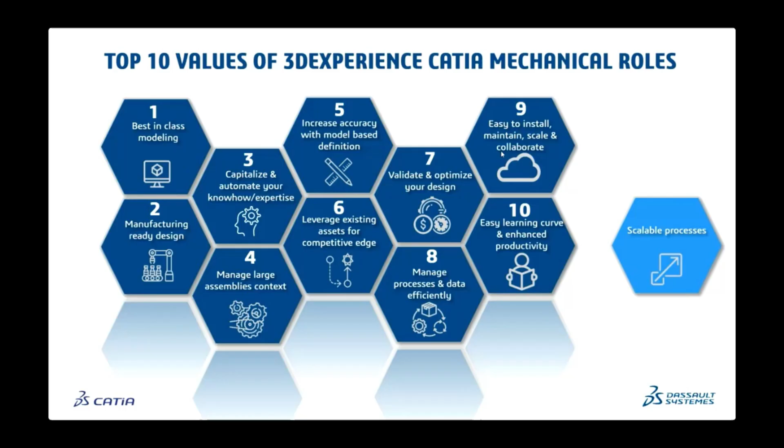And of course, and this is also the very first topic I would like to talk about, it's very easy to learn. If you are a CATIA V5 user, you will pick up 3DEXPERIENCE CATIA in less than a couple of hours, okay? And you will understand why just now. So remember, I will focus on best-in-class modeling, manufacturing-ready design, validate and optimize your design, and the easy learning curve and enhanced productivity that I will start with. Okay, what does it mean?

3DEXPERIENCE CATIA context-driven menu. It's very simple. Once you pick a geometrical entity in your session, a plane, a contour, a surface, a solid edge, a surface edge, the system, CATIA, will show you what is the most valuable command that you should use after having clicked on this particular entity. This pop-up and this selection of the most recommended action is in fact the result of a question survey that we made with experts on CATIA, and you will see that it's quite cool, and it's really also contextual.

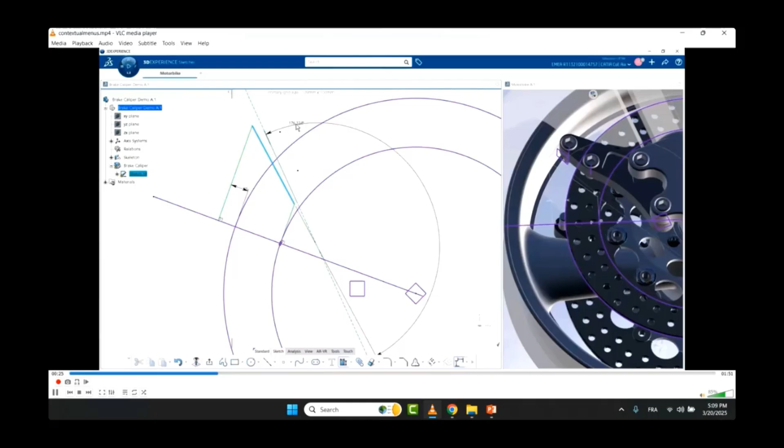You will see that even in the sketcher, depending on what you are doing, depending on what you are picking, CATIA will also pop up the most relevant command, the most pertinent command, according to your pick or your selection. Something you might also notice is that if you type in a dimension, just one click is enough to change the dimension. So in fact, in 3DX CATIA, we reduce drastically the number of clicks, but also, as you can see here, I click a corner. Do you want to do a fillet or a chamfer? And you will just select, okay? So the user is guided.

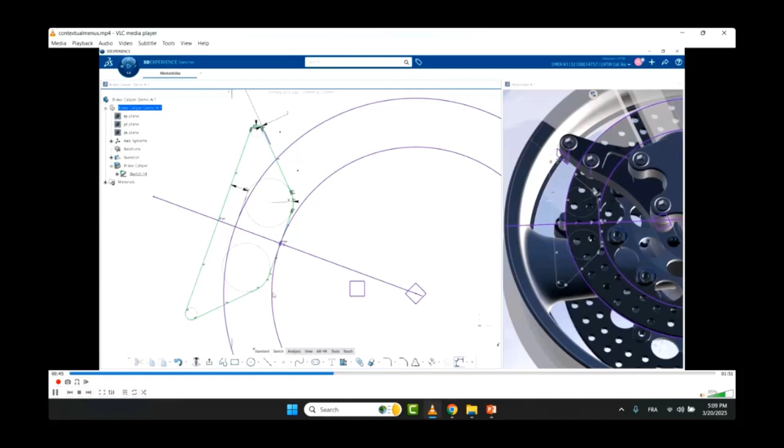The user will take less time to design the same design, but also he will create very quickly what he wants to do. And as you can see, there are not many big dialog boxes popping up everywhere. We try to focus the session around the 3D, and we focus the attention of the end user around the mouse location to be much more efficient and to drastically reduce the mouse mileage. We reduce the mouse mileage compared to CATIA V5 by 2. So not only is my finger less solicited, but also my hand, my wrist is in better shape, okay? So let's continue.

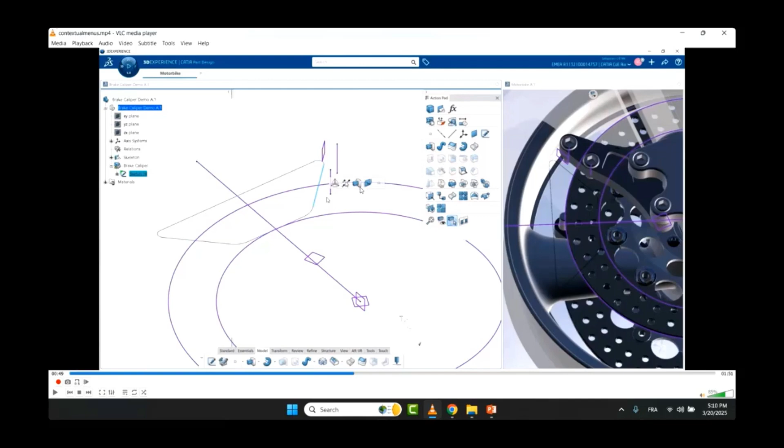Here you can see that when I click on my profile or my contour, CATIA will tell me, would you like to do a pad, which is an extrusion, okay? I say yes. I do my pad. And now if I do another sketch, and I click on the sketch, as you can see, CATIA not only proposes the pad, but also the pocket, because maybe the geometry that you will create by extruding this section or this profile will be used to add material or to remove material. So it's really depending on the context. And this is the beauty of what we call the contextual pop-up or immersive menus.

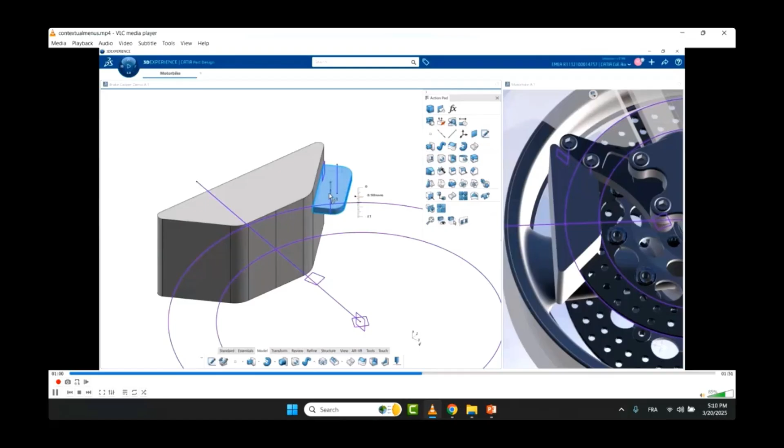What you see on the middle of the screen, by the way, was just the fact that if you want to have your preferred command, you just hit the space bar and there will be your preferred commands, which are located in the so-called action pad. Let's see another example of this contextual behavior.

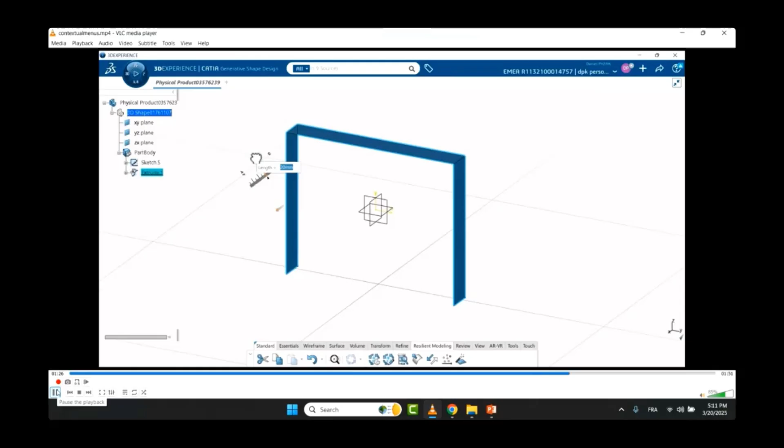Okay, I am in the sketcher. I create a polyline with 3 lines. It's open, okay, it's not closed. I left the sketcher, and now CATIA will pop up with, oh, maybe you would like to do an extrude. Makes sense. I would like to make an extrude. And I create my extrude. I type in the value of dimension of the extrusion.

Okay, and now let's imagine I go back to the sketcher. And I just want to close the contour. It's no longer 3 profiles, but it's a square, a closed contour. Now, if I leave the sketcher, the command that will pop up is no longer only the extrude, but also a fill command, because you can fill a closed contour, but you cannot fill an open contour, okay?

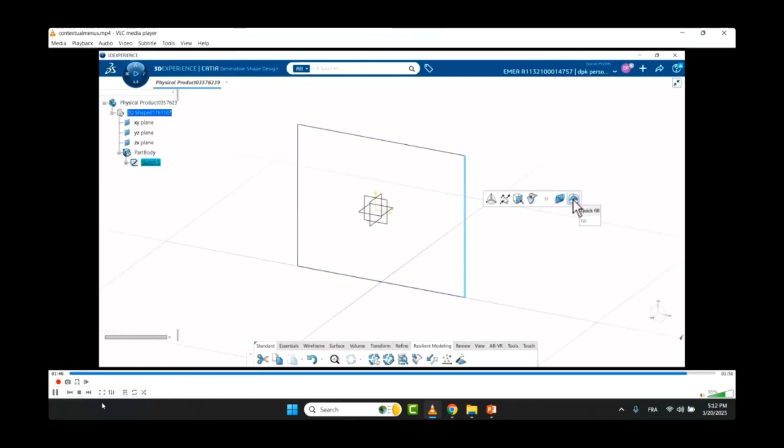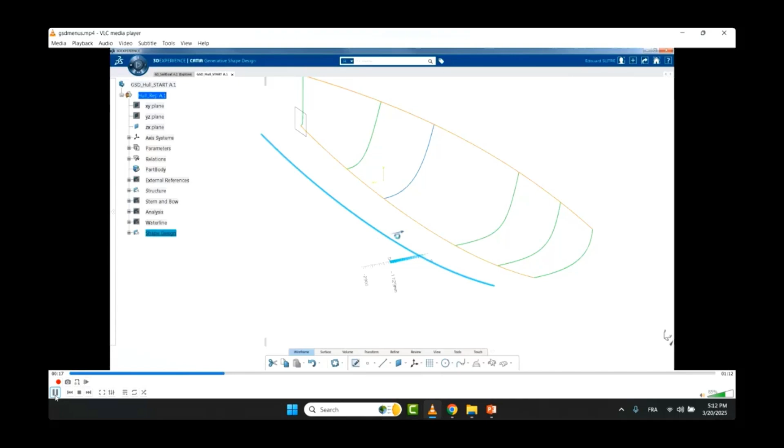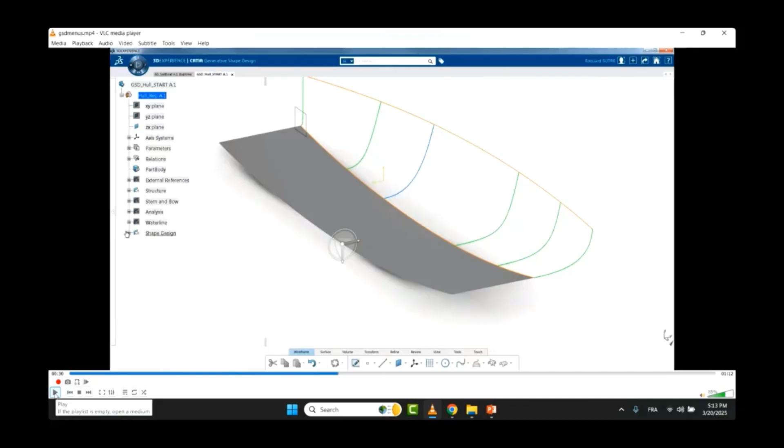I will select the first one and select not translate, but offset, okay? And then I move my compass, and then I create an offset curve. And then I can either only create the offset curve, or also create at the same time the surface. Okay, this is quite nice. I can, of course, change the dimension. And if I want to add extra parameters, much more advanced parameters to the surface that I created, to the extrude, like I was able to do before, I have a dialog box, I enter extra parameters.

So I would say that the classical users or the experts in CATIA V5, for example, probably at the beginning will use 3DX CATIA like they were used to doing in CATIA V5. It's the same. And probably smoothly, gradually, they will move to this new UI. And of course, a rookie will automatically use this new UI, which is much more efficient and much easier to learn.

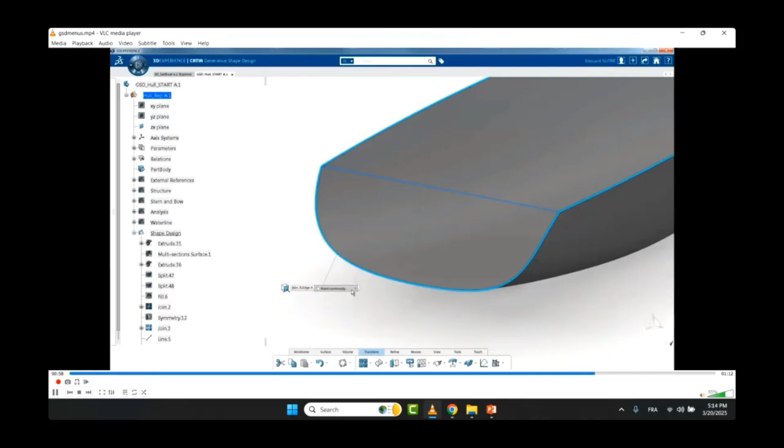Here, for example, I click on 2 points. And once I create 2 points, CATIA proposes to me a line. It makes sense. Then I will create a curve here by extracting it. And I want to extract the 2 curves. So I will just propagate with not only a point continuity or a tangent continuity. And once I have that, I have, in fact, 3 curves. Here we are. And by clicking on these 3 curves, I can also create a fill.

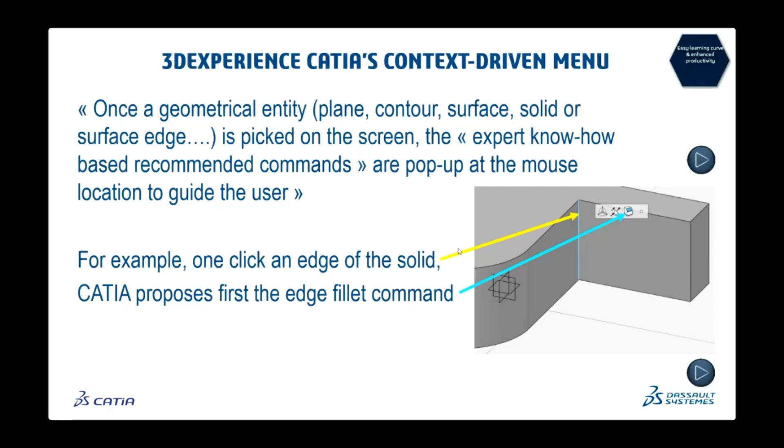So this is quite important because users of 3DX are much more efficient and they are guided, okay? That's important. And they are guided by the best commands that have been asked and collected from various experts of CATIA. So the users are even increasing their skill in CATIA.

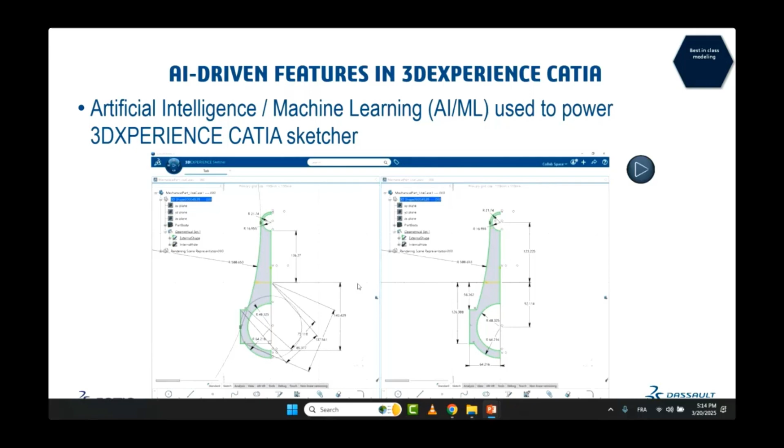Okay, we also introduced AI in the sketcher of CATIA. The sketcher is the most used command in CATIA everywhere in the world, okay? So what did we do? Let's have a look. This is already available in the product. It's not something which is coming. It's already available. So I go to the sketcher. I create one sketch of this particular rod. And there is a command in CATIA called auto constraints.

And what the auto constraints command does is try to create an iso-constrained sketch and create all the dimensions. You can imagine that if you send this drawing of the sketch to the manufacturing people, they will not be happy because it's not really mechanical. It's really based on the solver that we are using. And what the user has to do today, it's not a problem, he has to modify maybe the dimensions, the location to make it more readable, okay?

So what we did, we used AI ML, so artificial intelligence, machine learning, and we taught the machine with many sketches which are much more smartly dimensioned and constrained. And now, when you do a sketch like that, if you use the new AI-based command, the result is much more conform or compliant to what you were expecting, okay?

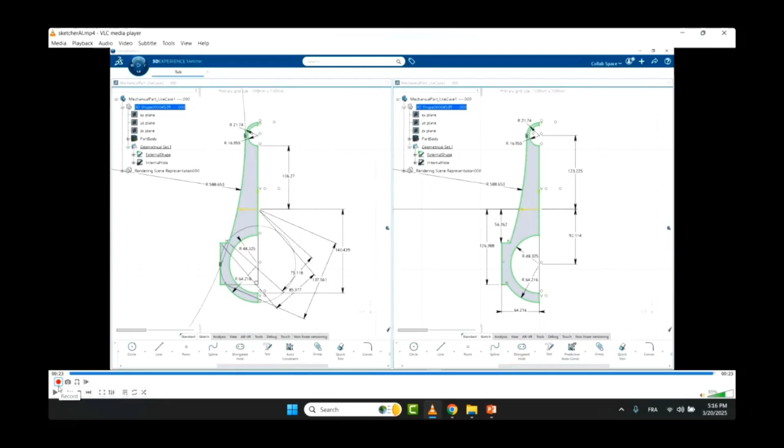If you move from the left side to the right side, it will probably take the user a couple of minutes, maybe 10 minutes. In this case, you are winning 10 minutes in one click, just thanks to AI. That's the beauty of AI in CATIA. We are using AI to power and improve the efficiency of the tool, to make the user much more efficient. This is really the philosophy of Dassault Systemes.

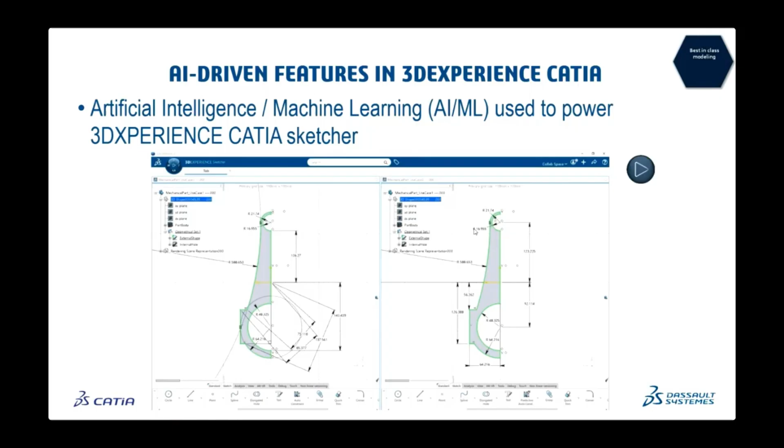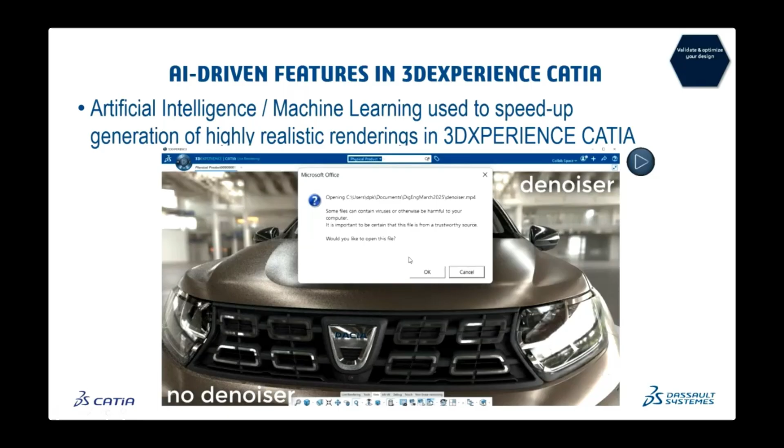I'll show you another AI-based feature later in the topology optimization tool, but we also use AI for very simple stuff, available for about 2 years now. In CATIA, we have something called live rendering, a special engine where you can do live ray tracing.

But it can take some time. You see on the left side of the screen, the computation is ongoing. On the right side, what we did is use AI to upscale the quality of the picture. So what you have on the right is a poor quality picture that has been quickly improved in terms of quality thanks to a denoiser, which is based on AI as well. You can get a very nice, acceptable rendering much faster than if you're just waiting for the CPU to do the job. So here are 2 examples of AI in CATIA.

Let's continue. Now let's talk about how optimization tools in CATIA can accelerate the design of experiments. Let's start with what you want to do, with a very simple example.

On the left side here, you see a special tooling which carries beer bottles in a machine to pack them into cardboard cartons, maybe 3, maybe 6, maybe 12, maybe 24 bottles. And you see in the middle the actual tooling itself, 22 components, almost 5 kilos.

So they used what I'll show you, our CATIA topology optimization tool. They also decided to print it. Why not? Most of our customers do casting or milling, and some of them, maybe 5%, use additive manufacturing. But in this particular case, it was 3D printed. They also decided to use a cheaper, non-metallic material.

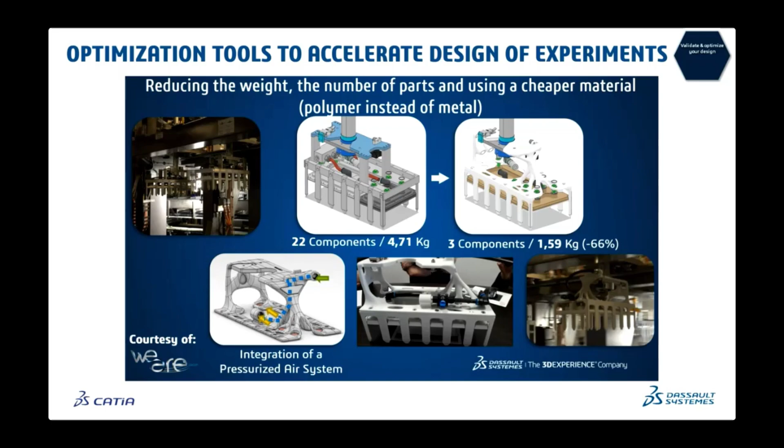How does it work? You start with specifications, boundary conditions, and load, the so-called design space. You start from a geometry, then you optimize it and get what you see here. Then you do some extra work to convert the optimization result into a good CAD model, and then you validate the CAD model. Every single step I described can be done in 3DEXPERIENCE CATIA with a dedicated app, and you'll be not only guided, but it's quite fast.

You can use our cloud computing capability, so you don't need an HPC server or a very big machine in your engineering office. You'll see that it's extremely productive, especially in a stage that's not that well known by people: going from optimization to a clean, clear CAD model concept. CATIA is probably the best tool to do this reconstruction, depending on the manufacturing process you've selected, as quickly as possible.

Let's have a look at that. The guidance is very simple. We have a very straightforward wizard. Even if you're not an FEA expert, just a mechanical designer like I am, you simply select the various stages, define the parameters, and get the result. So we have a dedicated user assistant, which is also quite nice. It's straightforward, the learning time isn't that big, and it helps you go faster and do your design faster.

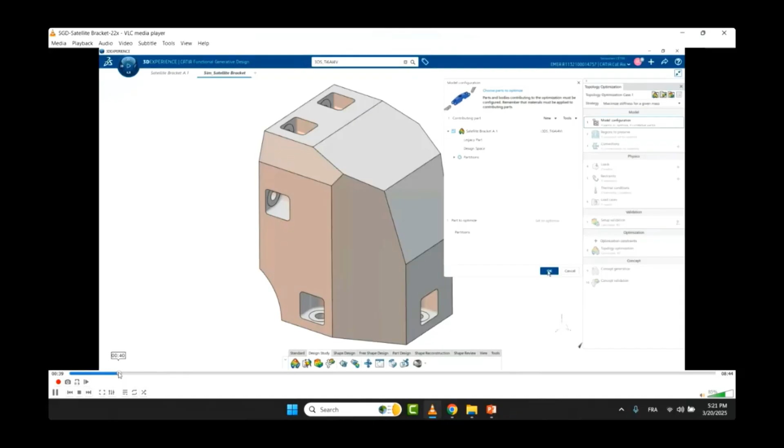So you take an existing part, you define the area you would like to protect and not remove material. You define the boundary condition and the load. Here I will have a virtual bolt with a given stiffness, axial stiffness, and a given shear stiffness. You define the loads.

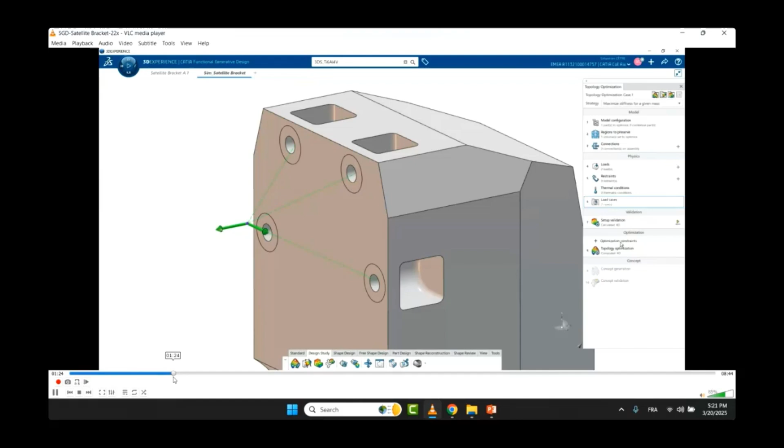So here it's a remote load at the center of gravity of the 4 drillings, which are in fact the mechanical interfaces with some parts which are besides that. You run the optimization, so CATIA will remove the unnecessary material.

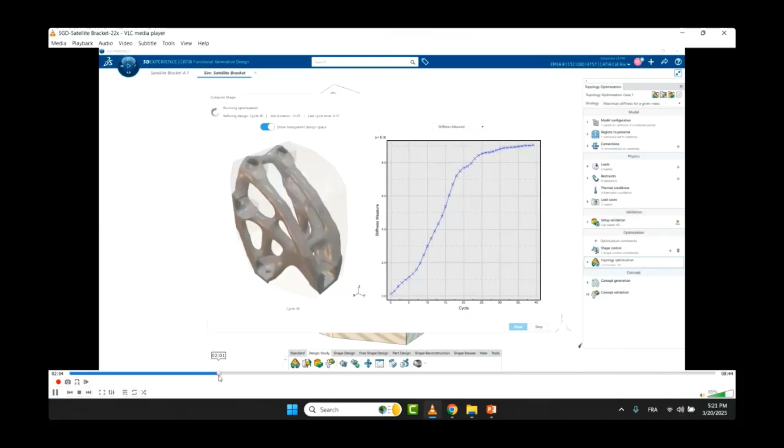Here we are, and now we have this geometry. And now, depending on the process you would like to use, you will have to adapt. You see what CATIA did here is it's no longer a mesh. It's not something which is smooth, looking like a smooth surface, which is not a smooth surface. Yes, it's a full CAD model.

It's not perfect, it's still a concept. We have to add some edge, some fillet, but it's really a CAD model. You can step out, you can mill it, you can do a drawing, you can also validate by simulation. It's not a mesh, we do that automatically. Nothing to do for the end user.

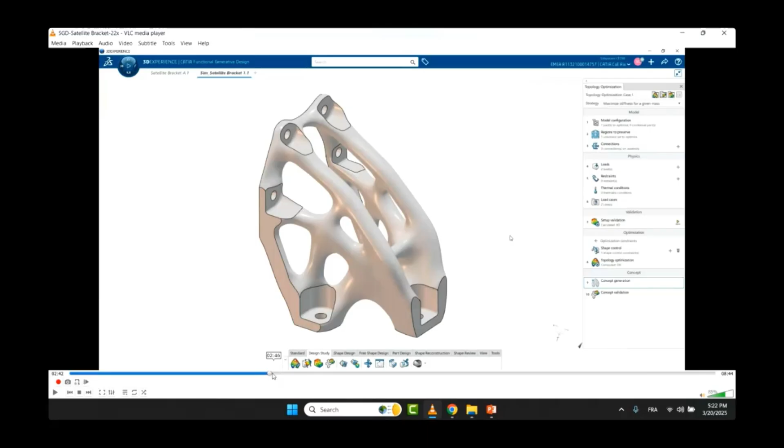So here we can first validate that everything is fine. The validation by FEA is inside CATIA to do that. And once you do that, maybe we change a parameter, and the parameter that I change, I only change one parameter. I say, okay, now I know what process I would like to do the manufacturing.

I will use casting, and I define the pulling direction. And this is the shape that I got.

Or maybe I would like to do milling. I gave the 3-axis direction of my milling machine, if it's a 3-axis milling machine. This is the result that I get.

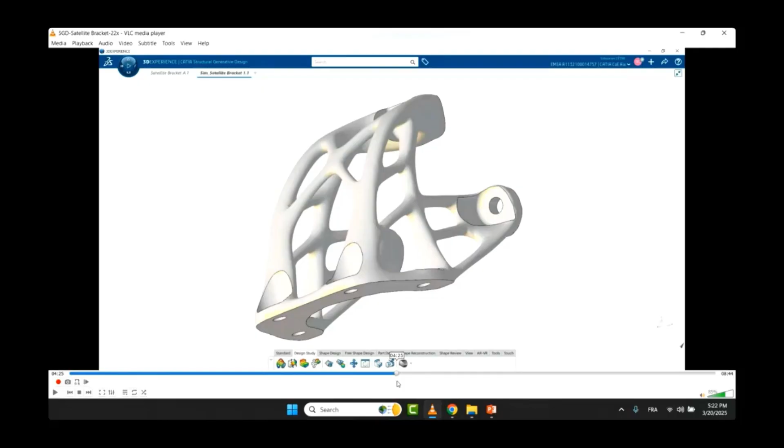I can also validate, I can also do additive manufacturing. I define the printing direction, the famous angle for the support, 40 degrees, 45 degrees. CATIA will try to make a geometry which is self-supported, no need for support when it can, when it is possible.

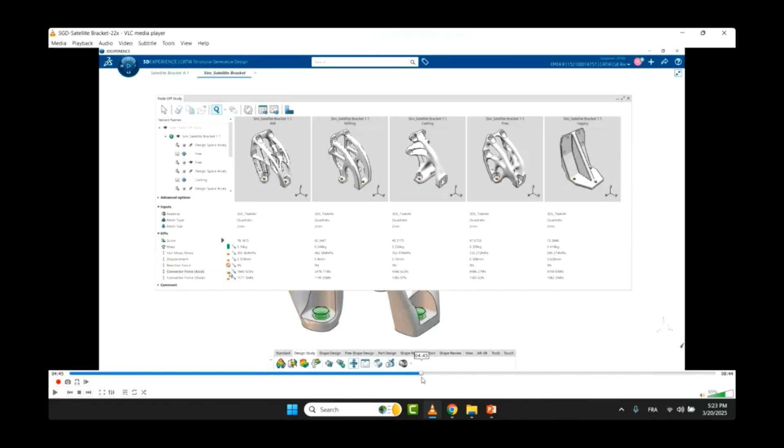And then I can also compare with a trade-off, which one is the best, depending on, of course, the cost, maybe also depending on how many parts I would like to produce. If it's one part, additive manufacturing is the cheapest. If I want 1,000 parts, milling is the cheapest. And if I want 1 million, I will probably use a tool like casting or plastic injection molding.

Something which is also cool in 3DX CATIA is that if I decide to go for milling, I have a dedicated wizard. It's patented. We put a patent on that.

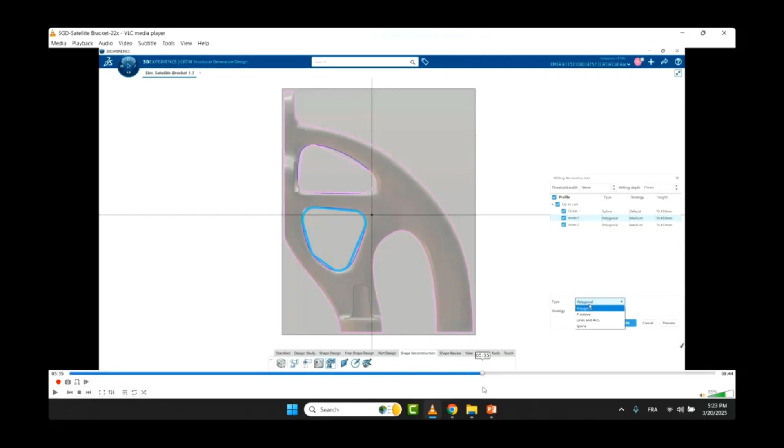And it looks at the 3 directions of the milling table, computes the silhouette, and the silhouette is created as a sketch. And we are using AI to approximate those silhouettes, especially for the pockets, which are polylines, into valuable sketches made of maybe a circle, maybe an oblong, maybe a square with some fillet, or any polyline contour.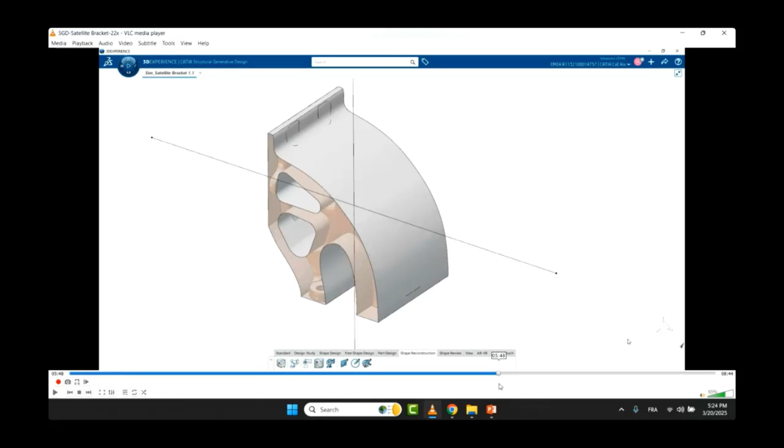And this is automatically done with AI, because we also taught the machine. We gave the machine a lot of profiles, and now the user is no longer forced to approximate or recognize himself the type of profile. The machine is doing that, thanks to AI inside CATIA.

And finally, you get the geometry, you get the final model, and you can, of course, if it's additive manufacturing, continue to improve it, run a simulation, and compare.

Now that this is done, we can do shape optimization. Let's say now I decided to go after my additive manufacturing product, not the milling one. So I have my part, but I computed the stress, and there are some areas which have excess peak of stress. It's not acceptable, okay?

So what I do, I isolate the area where I would like to remove the peak of stress. So this is my dark gray area that you will see on the screen. And now I will optimize only the shape, mainly, typically the fillet area. I bump them a little bit to remove the peak of stress.

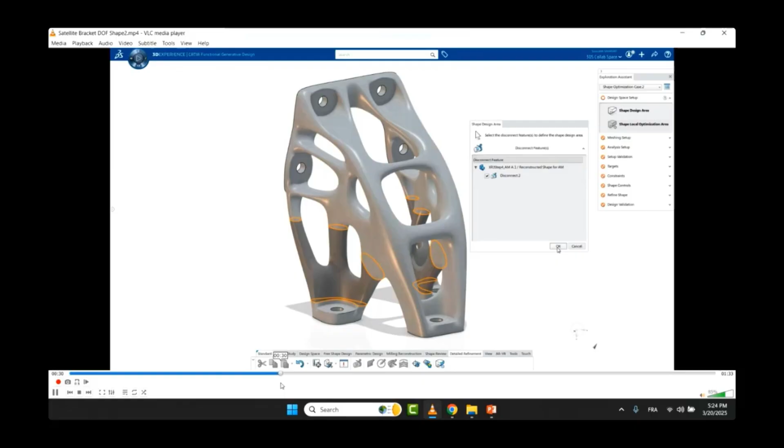And it's a similar tool inside CATIA to do not only topology optimization, but local shape optimization to remove peak of stress and to be sure that the part, once in service, will behave as expected. You see that we reduce drastically the peak of stress.

But we also do parametric optimization. Now I go back to my solid model that I created for being milled, okay? So the beauty of the platform and 3DX is we can use design of experiments, and it's called in CATIA and our 3DX parametric design study.

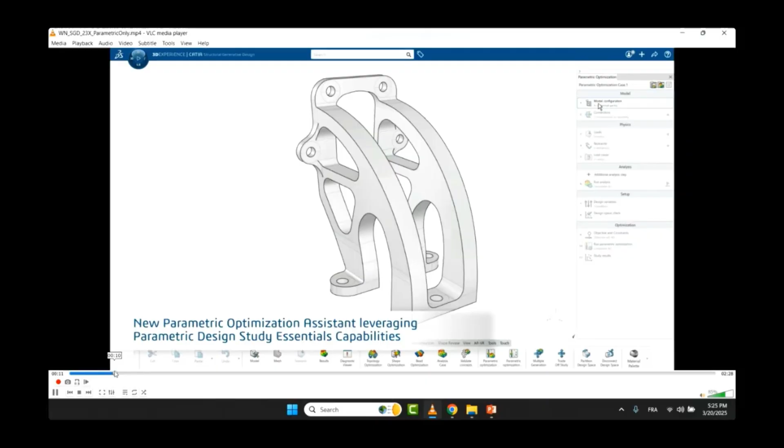How does it work? Now it works, you start with a parametric model, okay, the one I created with my milling assistant. And now I will say, okay, let's do multiple parameters.

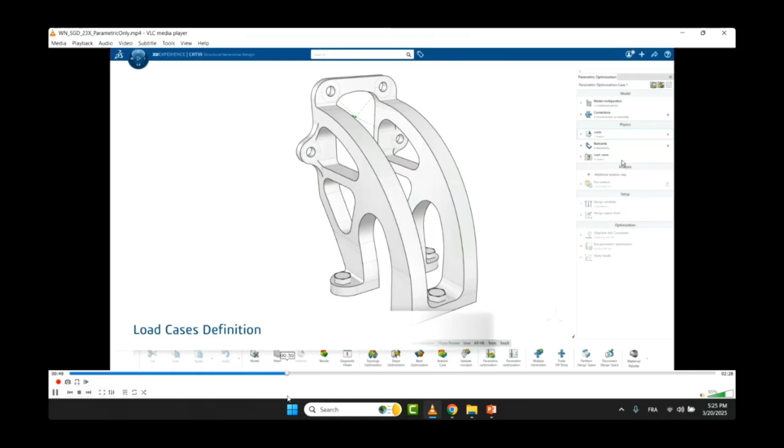You define the connection and the loads, and now you want to lightweight the part that was already lightweighted by the topology optimization. So you already define your load cases and boundary conditions, and CATIA will now run a parametric design study.

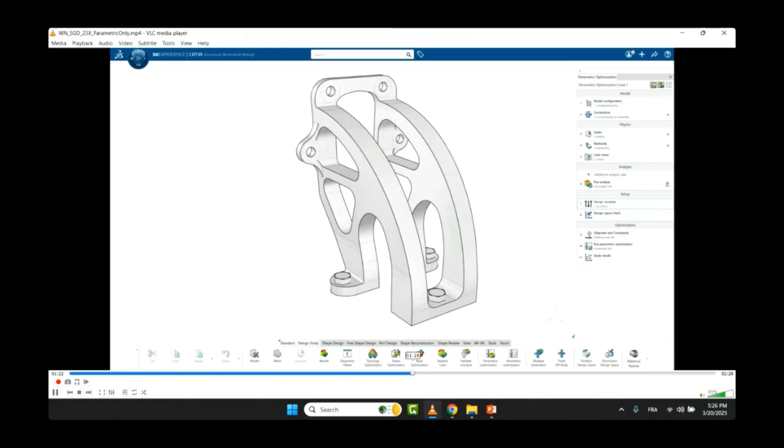You decide which variable should be used to compute the various variants. Here I selected 3 variables. You select the minimum value of the range, the maximum value, the step between two ranges. You select, of course, the response variable, and then CATIA computes all the samples, what we call points, all the variants of each parameter change.

And then it computes a simulation. So in this particular case, a structural analysis. And then I get the optimal solution, or I select some of them and compare them to see which one is the best.

And this is the over-optimized part in terms of weight. Why do we do that? Because typically when you are reconstructing a model, the human being always adds material. It does not remove, it goes over, not under. So by reconstructing the model, he extends a little bit or increases a little bit the weight. And this is a way to really go back to an optimal weighting.

And by the way, we do also the same, not only on massive parts like the one I showed you, but we can also work on sheet metal design parts. So you design a sheet metal part in CATIA. You can see that it is sheet metal because you can at any time unfold it. It's a feature of CATIA sheet metal design.

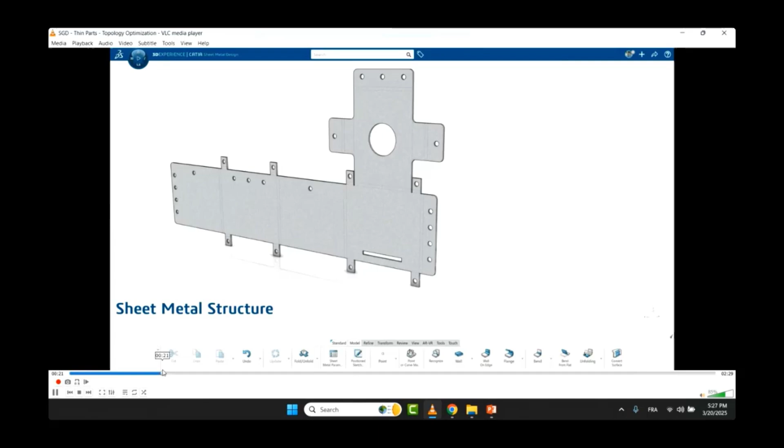And now I will try to optimize the weight of this satellite casing, micro satellite casing. Complex boundary conditions and loads, but it takes into account the context. And you will now improve the weight by just removing unnecessary material.

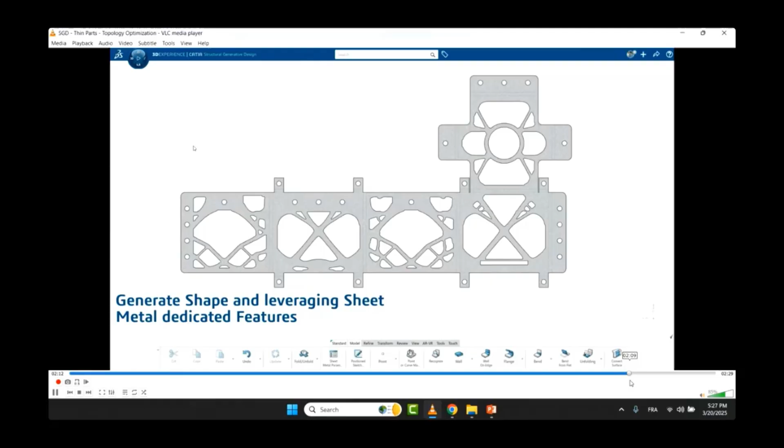And the good news is that it's still a sheet metal design part, so you can also have at any time the unfolded view, which is the one that will be used for manufacturing in the shop floor of this particular casing. And what is done on sheet metal design is also possible on just surface design. If you use our generative shape design surface design tool, you can do the same.

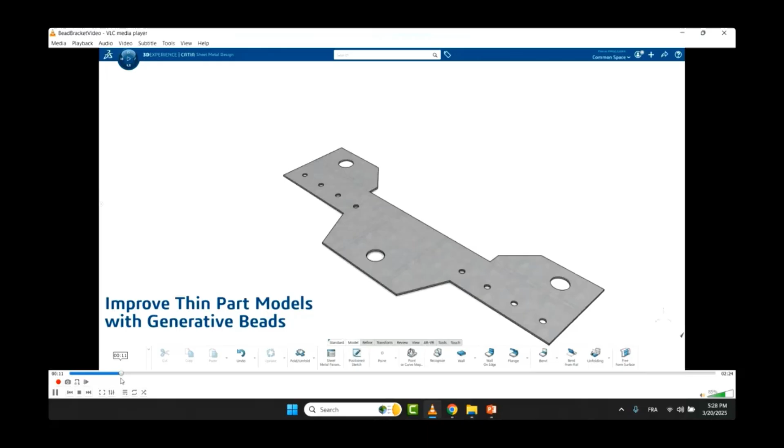And you can also not only reduce the weight, but you can also optimize the position of the beads. So let's say I have a sheet metal part. I define the area where I would like the bead to be created, to stiffen it, if you prefer. You define the boundary condition, you define the load.

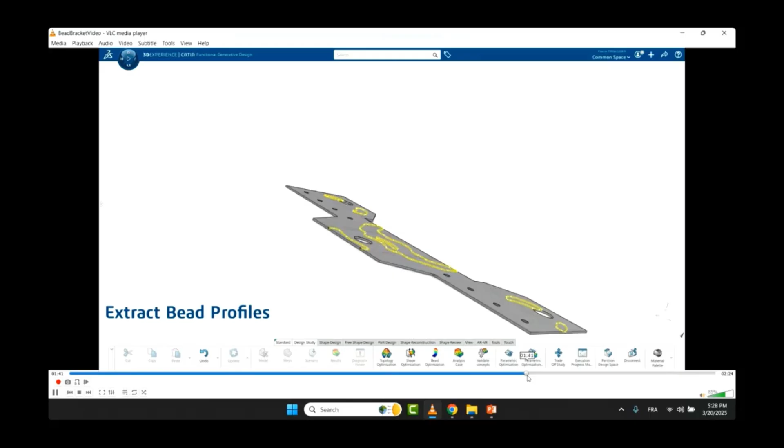Now it's no longer a tetrahedral mesh, but a shell mesh. Because as you know, on the sheet metal part, the thickness of the metal is constant. And then CATIA finds for you the area where you should put a stiffener. It will also tell you how deep the stiffener should be. Here we are, it recreates the depth.

It recreates the stamps on the sheet metal part, and you can then compute again and validate the two parts to check which one is the stiffer, but also the lighter.

So topology optimization on solid parts, on surfacing parts, and something very new, we introduced it in February this year. It's called parametric shape optimization. Maybe I'll have to first explain to you what parametric shape optimization is. It's a patent, it's a unique technology that belongs to Dassault Systemes.

We have parametric optimization, I showed you. We have non-parametric optimization, topology optimization, but we have also now introduced this one. What does it do? It starts from a parametric model, not a design space, but a parametric model. It preserves the geometric features and constraints. It's almost like parametric optimization, but the difference is that it is based on a fast sensitivity optimization.

In fact, it computes the gradient of evolution of the parameters, and it never remeshes for every single variant of your design. And therefore, it can handle a large number of variables. So it's like parametric optimization, but with a different technique, which allows taking a lot of design variables compared to the classical approach.

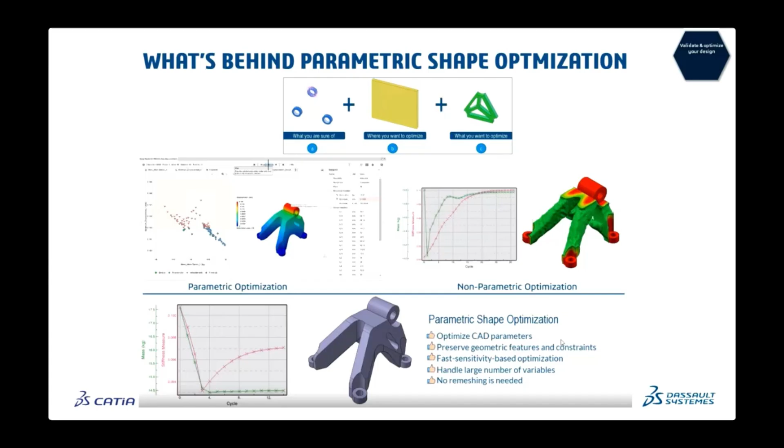Okay, let's go back to this video. So I have my crane.

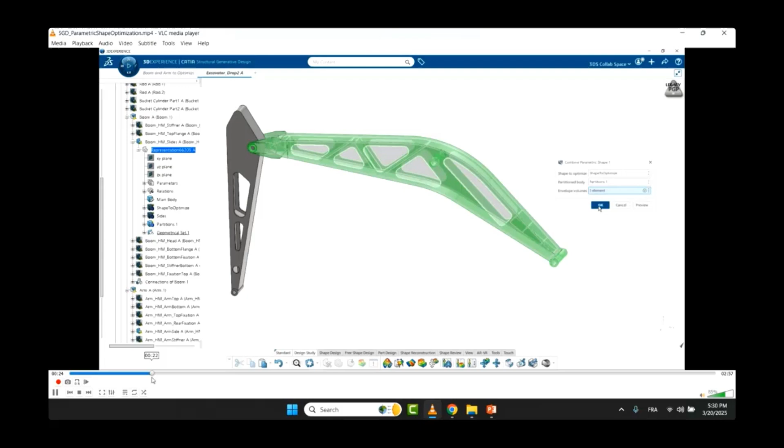Here we are. The crane of this excavator. This is a parametric model. I define first a solid, because you define what you want to change, but also where you want to change, which is a solid design, which was in green, okay? And now you run the parametric optimization. Of course, you have to define boundary conditions, loads.

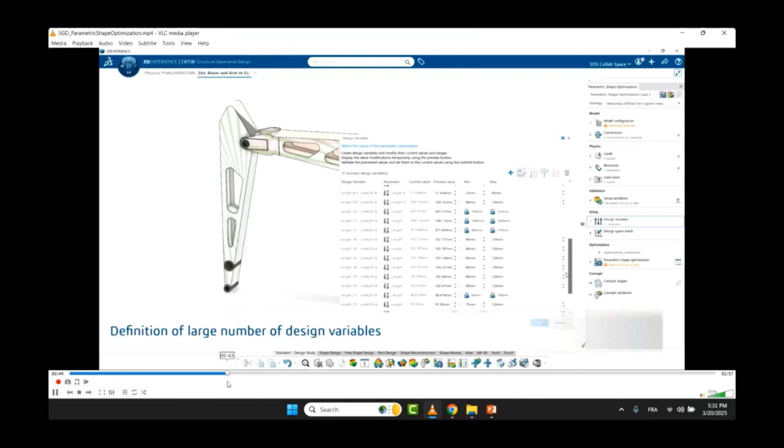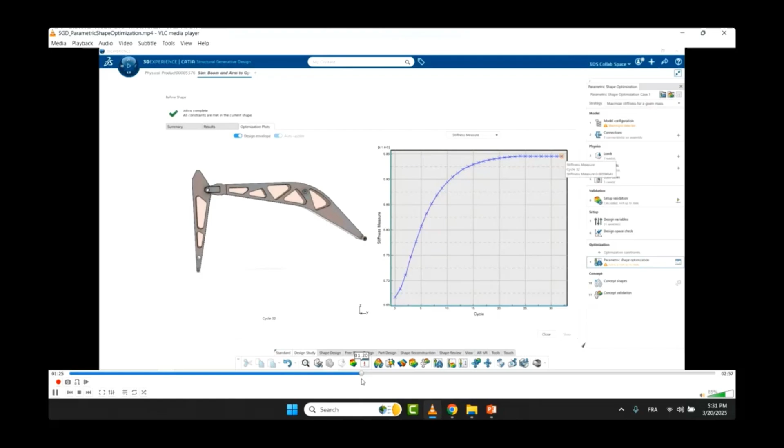You see all the design variables here? We have many of them. You define, of course, the response variable, what you would like to optimize. CATIA first computes everything to be sure that you have something which is acceptable. And then it optimizes all the parameters of the parametric design model to achieve the target in terms of von Mises stresses or maximum displacement or weight, which is typically the most important. Okay, stiffness and weight are important.

Now let's take another example. It's a hull of a boat. We have also many parameters. We'd like to optimize the thickness of all those ribs. Define the response variable, and then CATIA will also perform the optimization thanks to parametric shape optimization. And this one I like very much.

Let's say you have a part which has been topology optimized, and you smooth the result of the topology optimization by creating a subdivision surface. And as you know, subdivision surfaces are managed by the so-called base mesh. But now you would like to further gain weight on your topology optimized model, for example for additive manufacturing, and you will ask parametric shape optimization to optimize the position of the base mesh to reduce the weight, but still keep the stiffness of the part.

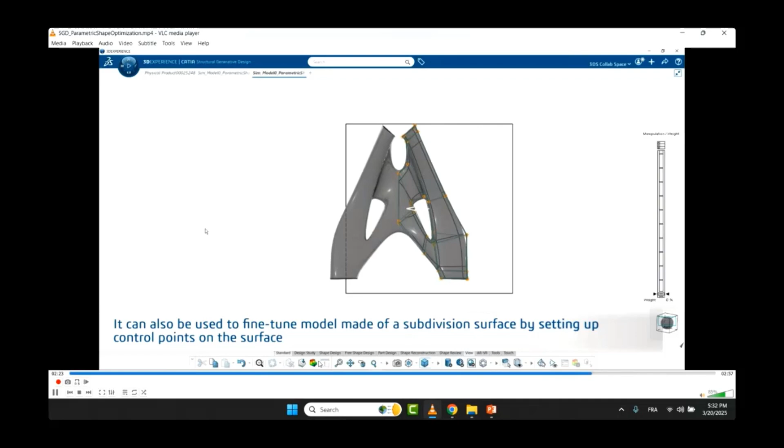So here I have 200 variables, and it's extremely fast to compute and optimize the position of all those base mesh points to reduce the weight of this already topology optimized part. Okay, that's the beauty of what we do.

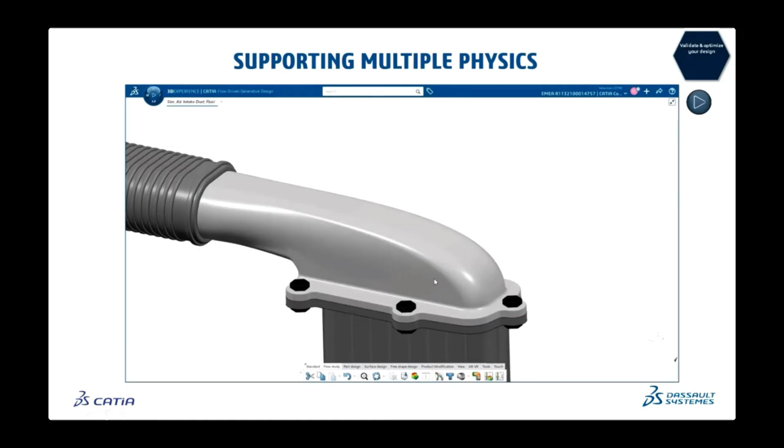By the way, we are not only structural analysis based, we are also doing fluidic optimization. So in this particular case, it's an air intake system. I will start by doing my topology optimization based on fluidic. I define the velocity at the inlet of the fluid. I define the expected pressure at the outlet, and then I compute the optimal vein of my shape. What CATIA is doing is just eliminating in the initial vein the areas which are creating turbulences, and therefore it will optimize the pressure drop.

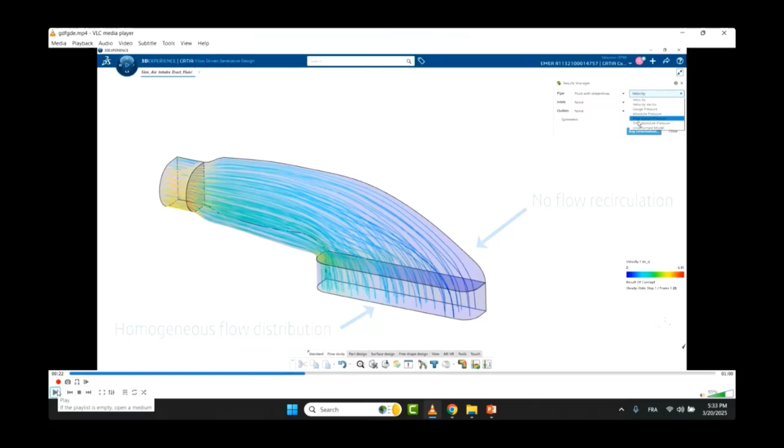Here you can see the fluid circulation. We can even add some filters, in or out, or both, and it will take into account the porosity of those filters. And at the end, I have my vein, and what I want to do is optimize the weight of the casing of the vein. So let's start with a classical casing, which is constant thickness everywhere. So now I run my topology optimization.

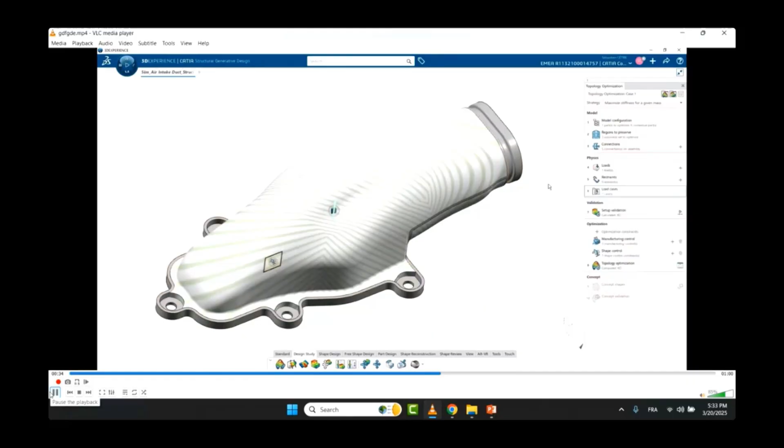I know the pressure of the fluid inside the vein. I know maybe how the part is fixed or fastened to other parts. And then this is what CATIA is creating for you, the ideal position of the ribs, because I decided to have a plastic injected part. And then you can compare the initial part, the one with ribs, and so on. Okay. So we can do multi-physics optimization in 3DEXPERIENCE CATIA.

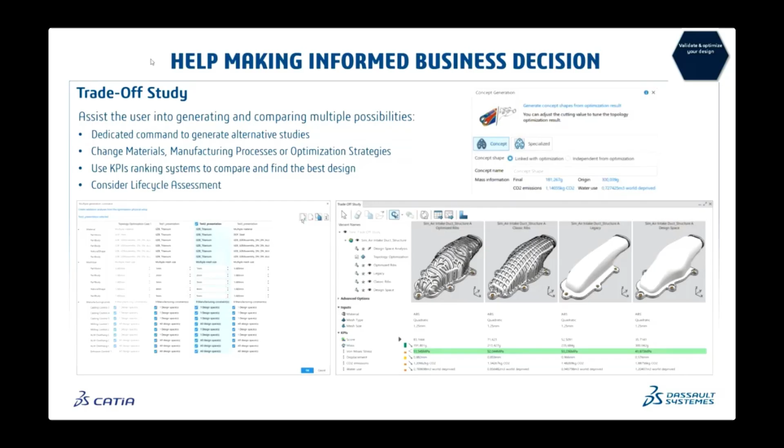So let's finish with some simple stuff, but you see here the trade-off study helps you to make the right decision. You can define your own KPI. You can define the priority of your KPI. Maybe weight is more important than max displacement, or maybe more important than von Mises stresses. You can also select new shapes. You will see the productivity of the tool is quite good to reconstruct the model. We support plastic injection molding, stamping, casting, forging, milling, additive, as I mentioned earlier.

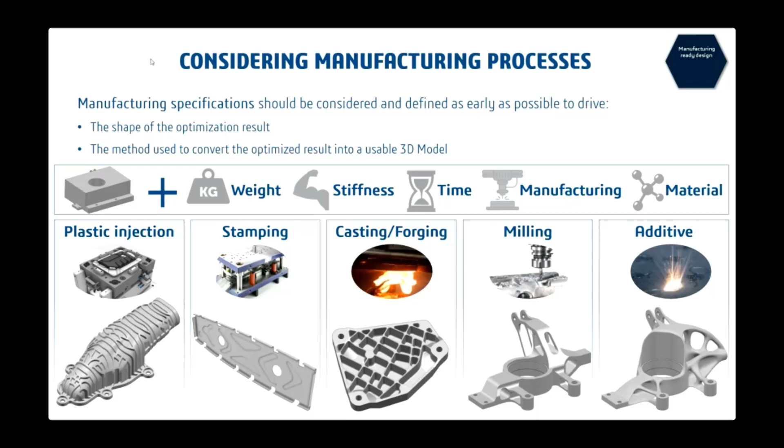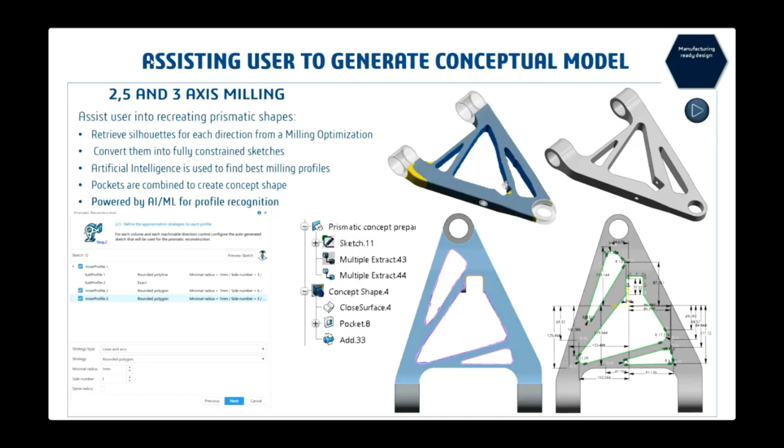And I already showed you that if you decide to go after 2.5 or 3-axis milling, we have this AI-based patent to recognize all those profiles and automatically create sketches, to be able for you maybe later on to modify and optimize further if you use parametric design study or parametric shape design optimization. You can also gain extra weight. You can also do the same on sheet metal. And again, it's not only sheet metal design parts, but also fully surface parts, like a body-in-white structure, for example.

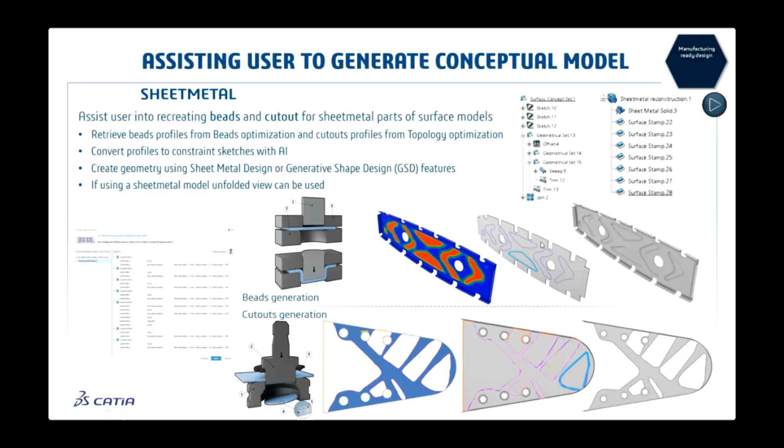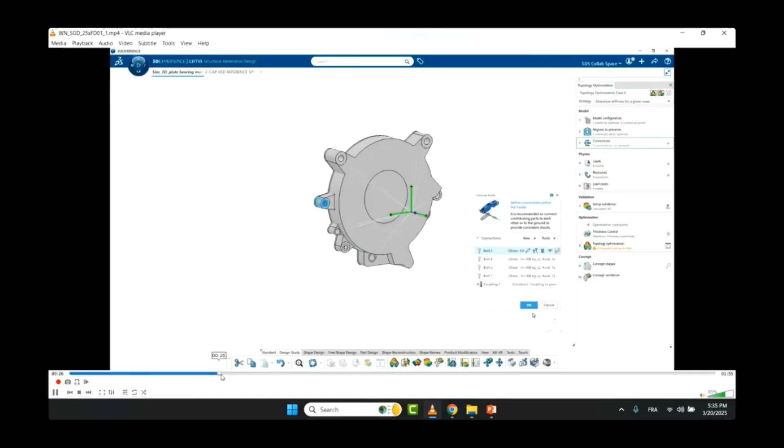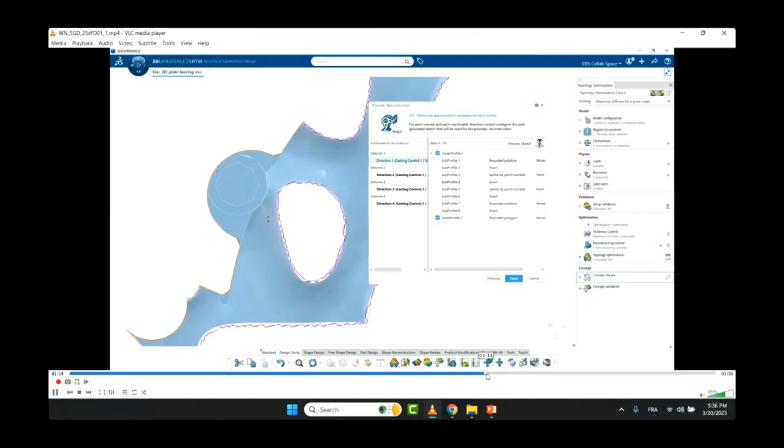It's the same process. I will not go through everything. It's exactly the same process, but I selected, of course, the pulling direction of the draw. And now what CATIA is doing is trying to help as much as it can the end user to reconstruct a usable CAD model, which will be used for the foundry process. So it creates various polylines and converts those polylines thanks to the AI machine learning technology, which has been embedded in this profile recognition. And it creates also a smooth geometry,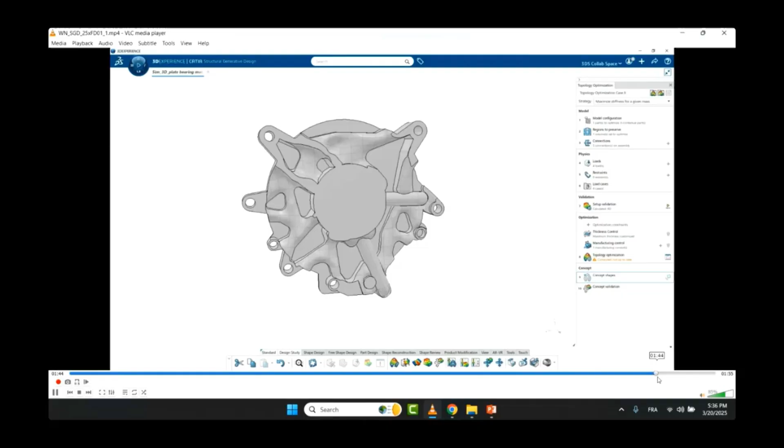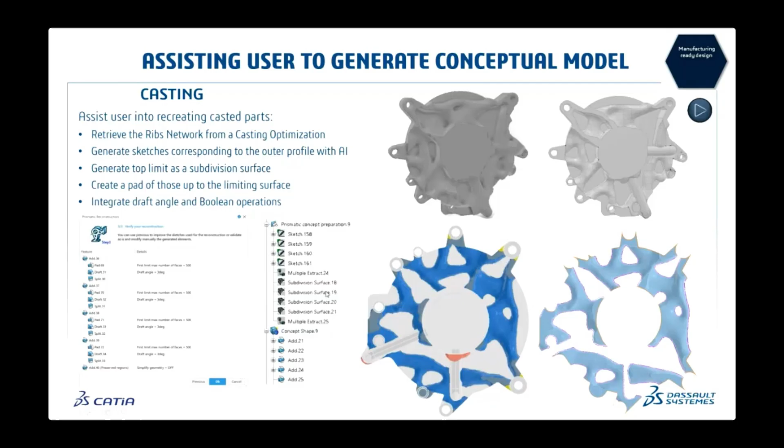and it projects the smooth geometry to the top of the part. And you see here what is created very quickly is a very nice part, and it takes less than 1 hour to do it. If you have to do it today, you can probably count around 3 or 4 days. Okay? And something I like very much as well is the fact that now we also automatically reconstruct the rib. Okay, so let's see how it works. It's quite cool too. It's almost my last slide.

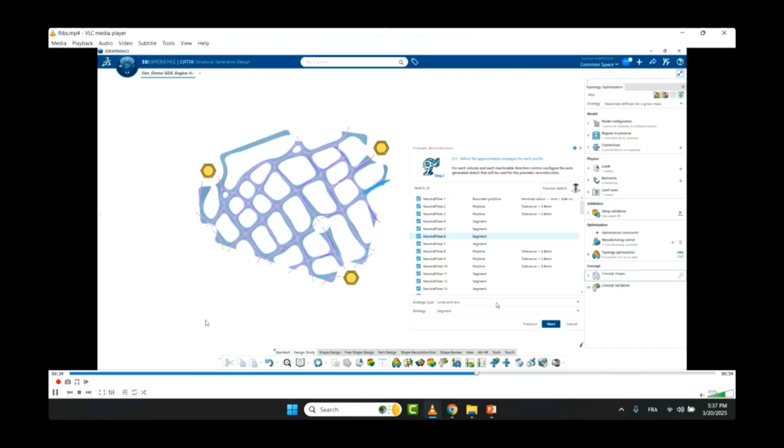So you take the part, you optimize the part. You know that. I have multiple ribs. The ribs are just polyhedra. Okay. So what we do is we have a special wizard. It will compute the center line of all those ribs. It will then compute, let's say, exact rib definition. Again, the same AI tool is used to approximate the polyline, which is the center line of these concept ribs, and create, let's say, canonical sketches, polylines made of segments, arcs of circle, and then it creates automatically the ribs for you with a given thickness.

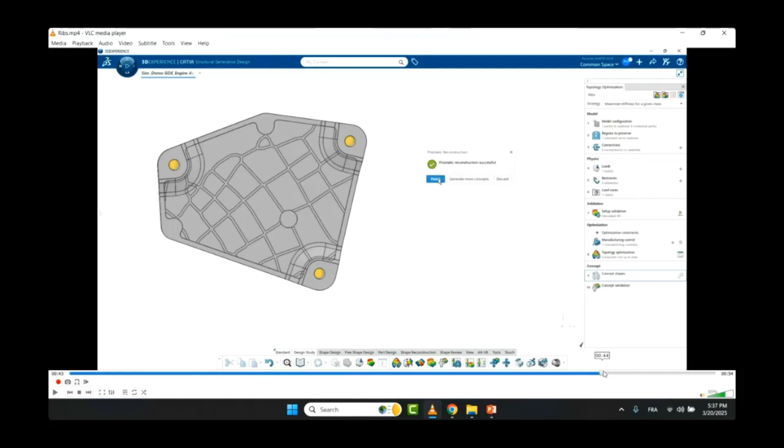It's important because most of the time, when people do such stuff, they create ribs like that. They have no idea where to put the ribs. So most of the time, the part is much heavier than what you expect. Here, it's really where you need to put the ribs. Okay, so you are sure about the optimal solution that you get, and this is the final job. And again, I can do such a job very, very quickly. If you have to do that manually, I can tell you it takes a lot of time.

Finally, last presentation. Let's discuss with a customer of ours. He has used our tool for a long, long time now, almost 4 years. And it's in French, but there is an English subtitle, okay?

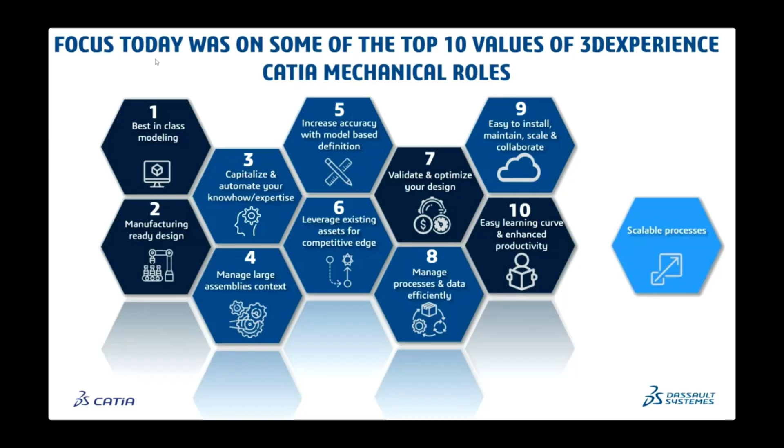I just want to conclude with what you saw. You saw a little bit of 3DEXPERIENCE CATIA, which is best-in-class modeling, how we integrate the manufacturing constraints at the very beginning, how you can optimize your design very easily, and how you can also learn the product very quickly. And now I leave the floor to Kenneth.

Very good. Welcome back, and we're going to do the Q&A together. So, by the way, we already have a lot of questions. Some of the questions came in during our registration from people who are registering. So let me go ahead and start with some of the questions that we received, Daniel, from the audience. Okay. All right. And then remember to get out from the screen share, and then you'll be back with me on screen here.

So the first question that I received is, what's the interrelationship between design of experiment and generative design? Does 3DEXPERIENCE develop an algorithm to interface between these tools so they somehow automatically support each other?

That's the essence of the question. Daniel, what do you think? What are your thoughts on that? Yeah, I think hopefully you saw what I showed. Either you use a design of experiment with our tool called parametric design study, standalone, and you get an optimized parametric model, or you want to really reduce weight in some area which is unknown for you, so you use topology optimization, and from the topology optimization result, you can create a parametric model, which can now be used by parametric design study. So you can combine both.

Very good. And another question following this up, somebody wants to know what's included, the components of the simulation that are in the optimization. For example, thermal, vibration, what's included? Yeah, today we do structural analysis. By the way, we are using our Abaqus solver to do that. We do also fluidic. We are also using the fluidic aspect of Abaqus. We are not for now running thermal optimization, neither vibration. We still compute the minimum eigenvalue frequency, okay, but it's not really vibration.